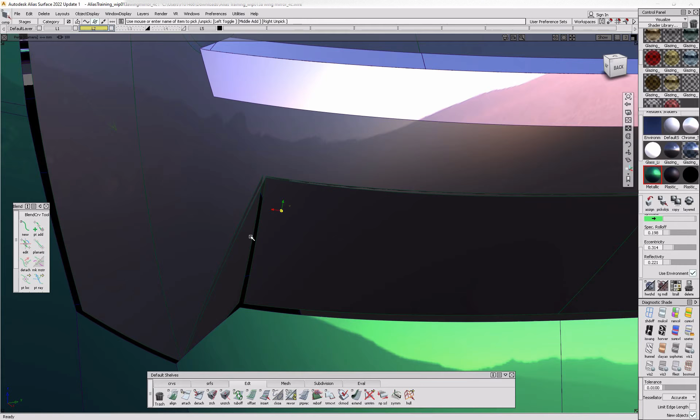And then we will hide the glass surfaces, the original glass surfaces. And then when you get things like this, just make sure you trim them back nicely. This is the problem with the offset tool, so I'm gonna play around with it.

Just snap this to there, that'll do. All of this that's intersecting, just select them all and select intersect, and intersect it with those surfaces and trim away. Just trim it all back, make it nice and tidy before we do anything else. Trim, trim, trim - obviously some curves on surface aren't going to go all the way to the end. I've got a little bit of a cold, so please try to ignore the sniffling.

Okay, these guys down here, intersect, trim back. Did I insert that there? Didn't work. Still didn't work because this needs to be extended this way as well. Wrong one. Oh no. Alright, untrim, trim. There we go.

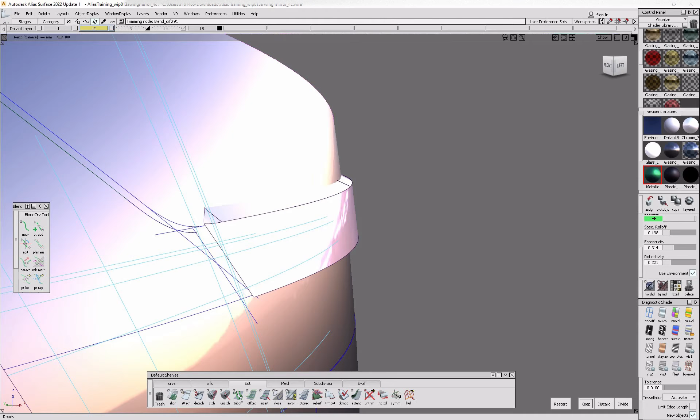Oh, I accidentally trimmed too much away. Still too much. Just want to be able to see most of it. This chrome strip as well, I noticed maybe I've trimmed it a bit too soon - it's meant to roll around this, so let's just get that glass back quickly. That'll be enough, yeah. And we'll kind of meant to just flow with this.

And then there'll be a radius there. Cool. Untrim, get rid of that. Oh, actually no, just get rid of that. Oh no, don't get rid of that. Trim that curve on surface back to there. Now project - sorry, get rid of this.

Project this on, and build a blend curve from like there to there. Cool. Project that on and then trim all of that back. And then untrim that, reproject that on. Right. And trim.

Cool, I'll do it right now, get rid of that glass. This area, go by that. Oh! There's going to be a radius on here, so that will help that. So we'll just trim that back for now. Or shall we do that? No.

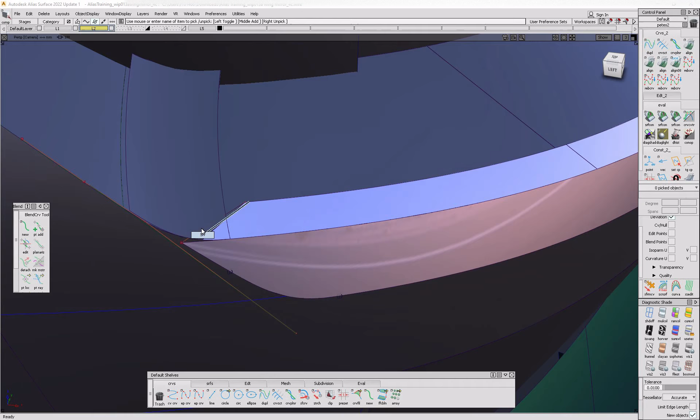Let's trim that away, keep. And get that surface as well, trim that back. And then we're going to run this all the way along. So there'll be a bit of an offset, there'll be a bit of a gap, but it doesn't matter. There we go - yeah, so that's annoying, but whatever.

Not bothered by that right now, let's concentrate on getting the details in for the lamp. I just realised probably want a surface in there. Okay. Yeah, don't forget these, we don't want those, we want these. Yeah, these need to be extended through. Screw that guy.

Freeform blend - so we just want to make sure that we have a clean base to work with before we carry on. It can be a little bit messy because the eye will be distracted by a lot of the details when we project them on. Just delete any rogue curves and surfaces. Right.

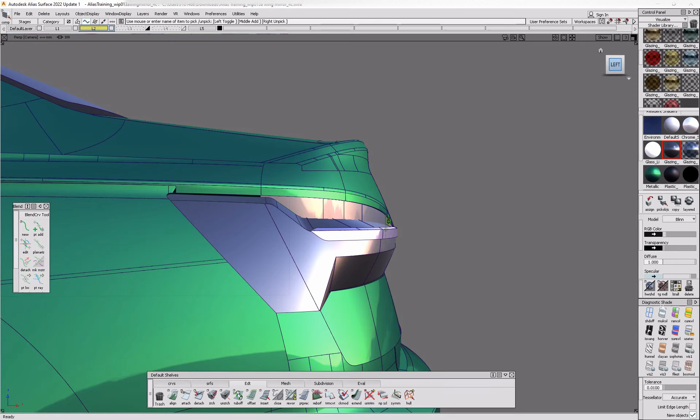Okay, so we have our base. What should we do first? We'll do the big lines. So here it looks like it is draft - this looks like the core, and then we draft off, like there's some 3D there. So we'll project this on first and work from there, so side view. I don't know what that little sliver is, just looks like a chamfer. Okay.

Get some crown in some places. Is that correct? Yeah, I think so. It's just this is all going to be quite thin and then it's going to draft back. Okay, so let's project that onto those.

I can give that a bit of crown. I'm going to use this shader. Okay. I'm good. So for now I'm just going to trim divide because that's the best way, like we did on the headlamp. And then you can offset again.

Oh my god, where's it gone? I thought I divided. That's annoying. I've obviously selected keep rather than divide. Okay, so make sure you select divide. What's going on here? Too many curves on surface, getting confused.

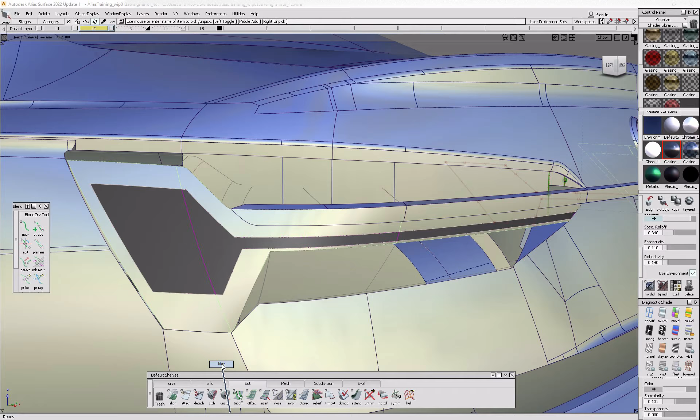Right, so we've got our main surface in here now. Show you a different colour so we know. And we'll offset back because, wait there, let's have a look at the image again. Yeah, there's like a little bit of section there. So let's put that in and we can just work around that.

So I'm going to offset these back again, maybe another 3 mil, but we'll see. Yeah, let's go for 3 mil. So we'll just template these outer edges, outer surfaces, just in case we need to go back to them, and then we'll skin between there and there to give it some 3D.

Skin, connect ends, skin. You can also give it some crown, proportional crown, so yeah, tiny bit. Oh my god, skin, proportional crown, make sure they're all going in positive proportional crown as well. Like if I flip that, you'll see that it's negative, now it's positive. Here.

Oh, that's annoying. Why is that? Anyway, it doesn't matter. So we wanted it to come to a point here. At the moment there's a trim edge that is a radius, we don't want that. So we're just going to extend that through, maybe extend that through as well. Flip the crown, there you go. Probably just extend this as well.

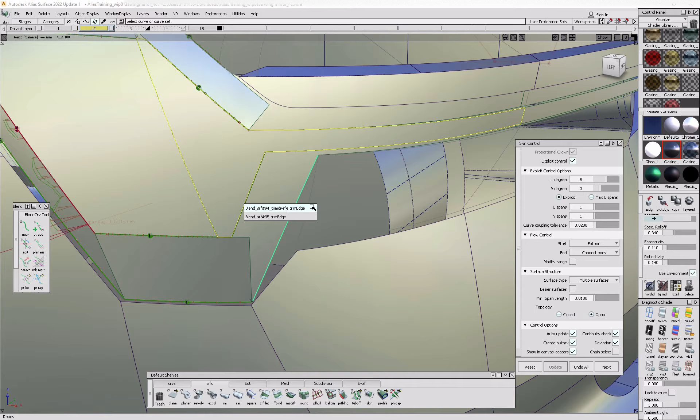And we'll just build our own radius in there, down here, let's just extend that. Make sure the crown's going the right way. It is, this one can be connect ends. And also as we're doing this, as we're going along, keep making sure the crown's going in the right direction, but also that doesn't look like it's going right. Oh, it's because there's no crown.

There we go. Does this one have crown? No, don't know why it does that, and it's going in the wrong direction now. Flip the crown. Does this one have crown? Yes.

We check from the rear view as well that it's making sense. Yeah, that looks okay, I think. Yeah, I think that's correct. And if it's not perfect, I don't care anymore. Yeah, no, it looks right based on the image, 3D image.

Skin, 1, 2, flip crown. Oh, this one isn't doing what I hoped it would do. Undo that. Yeah, why are they doing different things? Whatever, we'll retrim this because this edge has gone a bit funky here, so we'll just retrim that to match this edge.

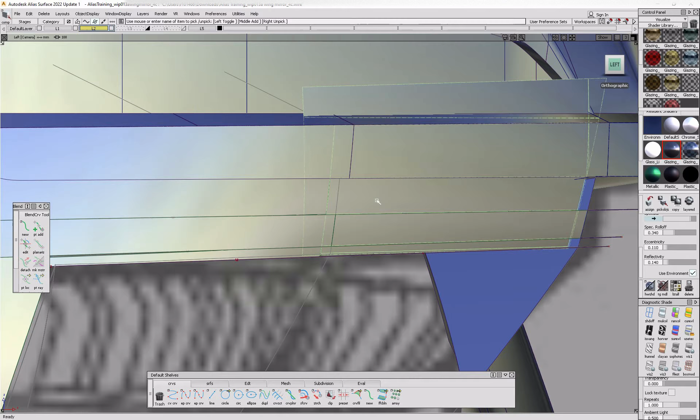Untrim. Keep. Oh. This one as well. Oh, it needs to be extended. Project, trim, trim.

This little sliver here needs to be fixed, so we just need to extend that. Ooh, those CVs aren't liking it. Alright, let's just keep it as is for now, we'll fix it when we put the skins in. I'm going to hide this chrome strip because it's annoying me. This is meant to go from there to there, but it's not. That's fine, because we'll just do this one.

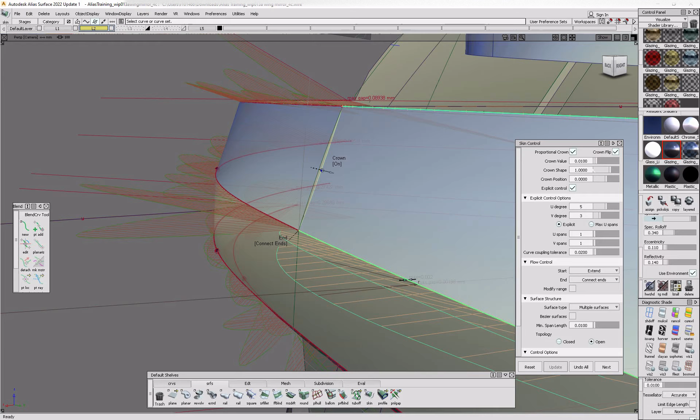Okay, good. Skin. Is the crown going in the right direction? Yep. Skin here. There, and then same for this top edge. And it doesn't matter, like, obviously you can see positional errors, it's not a big deal, especially when doing these little details, because you can just radius over the error.

Oh, here there's an error because I didn't align this. This projected curve needs to be aligned. Now that should run more smoothly, even if it's not perfect. Why is it not perfect? I don't know.

Same for this as well. What's going on here? Oh god. Wow, okay, well that's obviously an error. And let's Bezier, weird, I don't know why it's doing that. Let's try skinning again, see what happens. Yeah, so weird, try freeform blend, position to position.

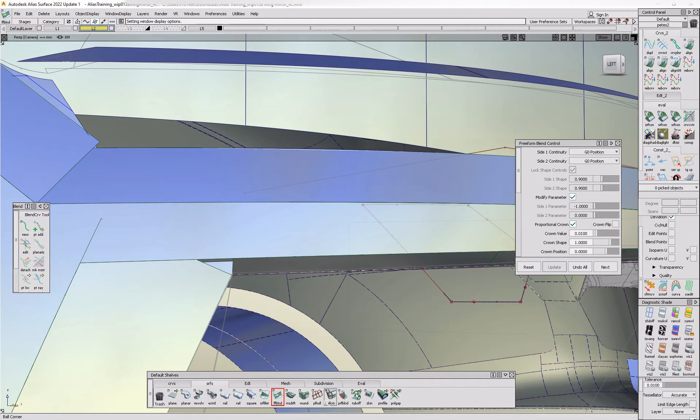There you go, it's Beziering surfaces now. Can I extend? No, it doesn't let me extend, of course. Whatever. Proportional crown, 1. At least that's all connected now. Sometimes skin just does some weird stuff and doesn't like what you're doing, and you have to find other ways to do it. I'll just extend this through here now.

Get rid of some of these curves. Gonna trim this back.

Okay, so that's the first bit in. There are areas here that need fixing. I'll tangent align that to there, and tangent align that to there. The reason I'm using tangent is so it doesn't affect the surface more than I want it to - I just want to minimally align them to each other without affecting what they're doing too much.

Now let's put these radiuses in, freeform blends, whatever you want to call them. I'm using the freeform blend to manually put in my radius. So do it about there. 1, 2, 1, 2. We need to move these along a bit, just so that's around the center point. Freeform blend, make sure that's back to curvature, curvature, and align, edge align, edge align.

Project that edge on, and trim it this time. I'm just going to discard the little triangle. Oh, it doesn't like that, see, so I do need to move that back that way. It's fine. Surface behind it can now go away, we don't need that. Just templated the surface behind, just so it doesn't get too confusing. And then we've got a nice 3D object for the tail lamp inner.

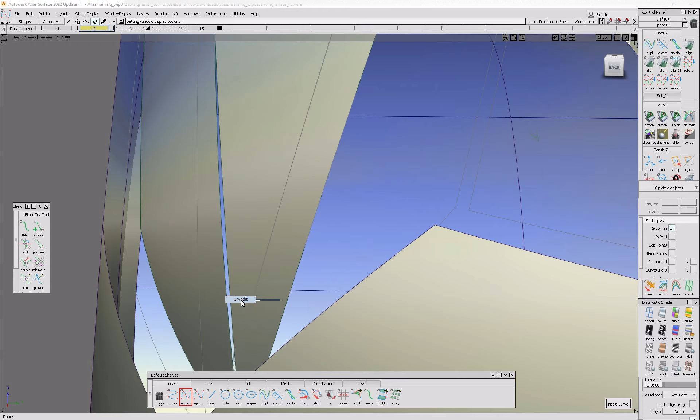So on mine, there's an obvious break. Well, it's not terrible. Why is that so much more crowned? It's the same amount of crown. Is it going to different points?

Anyway, we'll reduce the crown on this bottom one. I'm going to stick with what I have, and I think the graphics trick the eye into thinking it's flat when actually there's a break somewhere. So that goes all the way along to there, whereas mine stops here.

Yeah, it's confusing. It looks like it's trimmed and there's like a ledge there, right? So, yeah, let's just trim it away here.

One, two. Sorry, and this one. See what that looks like. Oh, I discarded - make sure you select keep. Keep. Yeah, so we want that to be more flush.

But for now I'm just going to disguise it with a big radius and see what that looks like. Keep. Freeform blend. Whatever, that'll do for me. Trim that back.

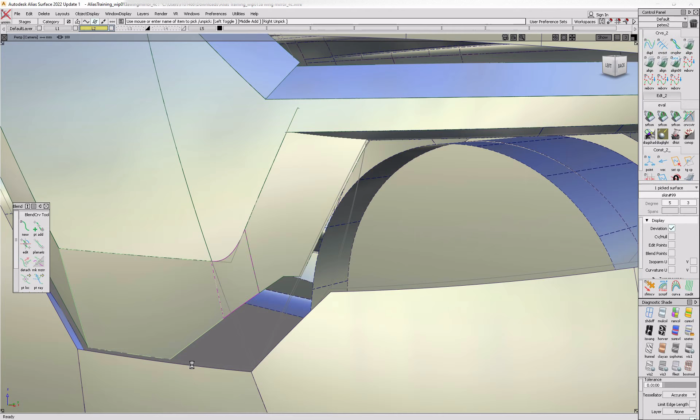So yeah, that is meant to be more like that. Mine goes a bit wonky, but it's going to be difficult to fix that.

So like, oh, I've lost my shelf. There it is. And this is why details like this are so tricky, because there's so many little intricate edges that you need to get right, and it requires you to keep tweaking areas to make it look the way it should.

Delete that, freeform blend. Trim that back, and then the top one up here as well. Trim, freeform blend. Edge align.

And then these two down here. It's quite a big one here. Two. Freeform blend. Set this edge align straight away.

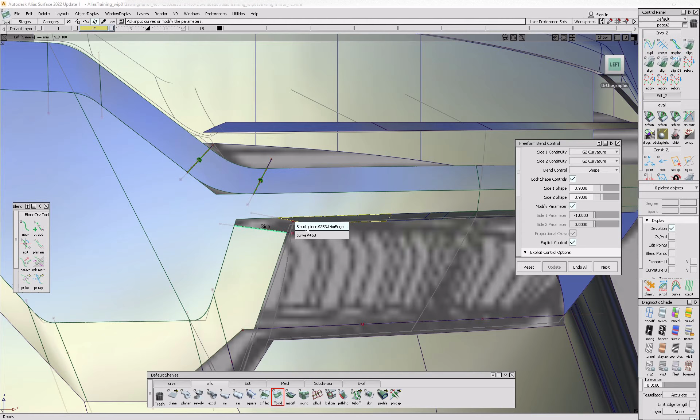So here I could just use the fillet tool, but I don't know, I'm in the habit of using the freeform blend tool, so I'm just using that. As long as you draw your curves in correctly, then it won't do something weird like this. Oh, it's not liking the edge align for some reason.

It should be fine. Right, okay, let's try the fillet tool this time. 1, 2, go. No, it didn't like that. For some reason it's not liking it. It's really weird. Oh, it's on chamfer - make sure it's on curvature.

Edge align. It's on, my settings are all over the place. Why is it not liking this at all? Weird. Yeah, look at that. Why is it doing that? It shouldn't be. Is there a curve on surface there? No.

Anyway, if everything else fails, just skin. Connect ends, and then just align it. Align the skin. Edge align - yes, so it works when I do edge align with the skin, but not when I do it with freeform blend.

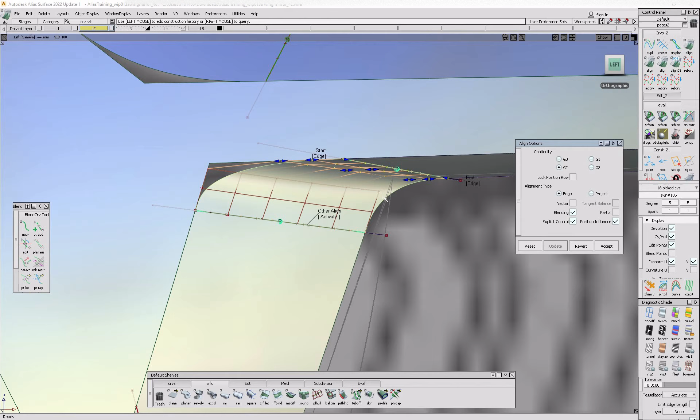This shouldn't be going so weird, so that, and that. That'll do. Delete the history. And then we'll just retrim this surface to those edges. I'm going to delete the history on all of those, because when you untrim it just seems to do stuff that you don't want it to.

Untrim, project these curves on, and keep. Actually, it doesn't like that either. Let's get rid of that. Oh no! Reproject this curve on surface. 1, 2, 3, go. Okay, that's our first bit of 3D.

Next, I don't know, should we start from the bottom? This is just a big flat here, and then a big flat on top, but leaning backwards, and then just trim divide. So let's do that one. Get that one out of the way.

And we can probably get this back and template that and trim it. No, it doesn't like it. Alright, forget that. Template that. What we're going to do is draft off of this lower edge. It doesn't like that either, does it? Yeah, no, it should be trimmed all the way to there. Why didn't I do that? I don't know, I didn't trim far enough inboard. But I can fix that by doing that now.

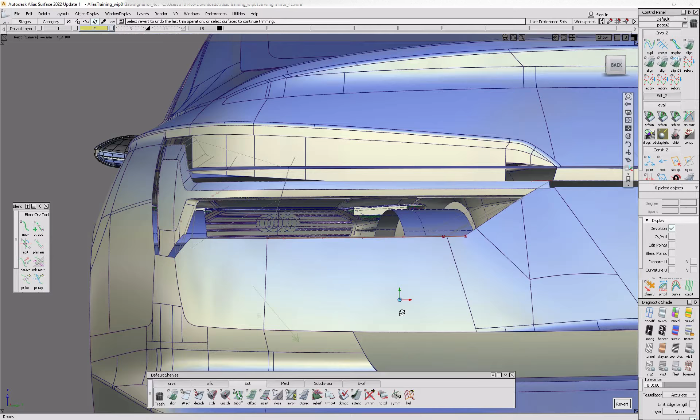Let's trim that back. Keep. I'm going to duplicate this curve on surface and extend it, so we don't have to sketch a curve and align it. Cool. And then we're going to just look at the image again quickly.

Yeah, so it's just a surface that should be offset to the glass, but obviously I'm not going to do it because I feel like this is doing something different to the glass anyway. Like the glass is leaning out this way, but this surface is a bit more upright. So we're just going to draft off of this lower edge of the body like that.

Give it a bit of lean, like 5. Yeah, we can do this manually anyway. I'm just going to bring it to there, maybe extend it through. Oh, come off it. Try extending this. There we go. And we'll judge that. That needs to come all the way up to there.

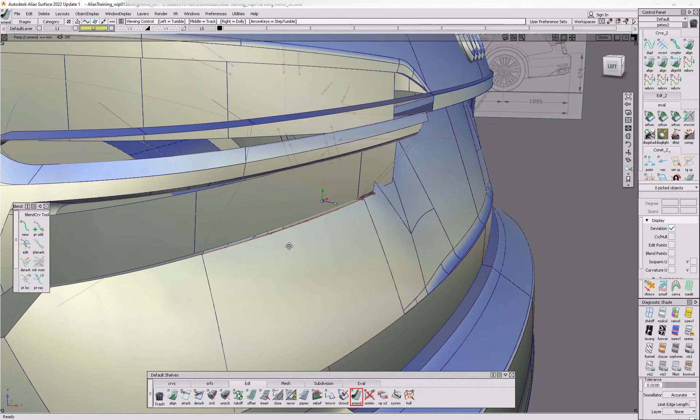So let me look at the image again. Stops there. What we're going to need to do is just project the line on for now. And okay, so the core is there. It seems to go down like that, which is weird, but it should just be straight in side view, I feel. What's it look like in rear view?

Yeah, so that orthographic's crap. Side view, it shouldn't be rotating downwards, it should just be nice and clean. Cool. Let's also trim the bottom away as well.

Yeah, we'll use this curve that I already built. Trim, trim, trim. And in order to stop it from clashing through, well then again, no, the glass is offset, so that's fine. Just trim that back. I feel like it can actually come further rearwards. Yeah, that also doesn't matter because it's also.

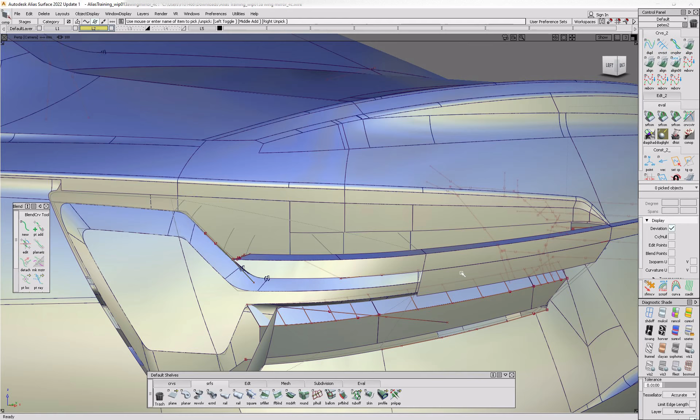I'll just do this quickly. Go away, yeah, I'm just going to have to shade it all up. Oh no. 1, 2, 3, go away, go away, go away, go away, go away. Go away, go away. Actually, I'm going to keep the chrome there. Go away. Get rid of all the curves. Get rid of that guy because it's distracting. Get rid of the templates. So I've just hidden the templates, I haven't actually gotten rid of them.

That's template, because that's going to be different now. That needs to be shot through. But anyway, one thing at a time. Now we're going to trim this. So it's like there's a border. But that border is just from this. So that's fine. It looks like it should be lower then, but let me see again.

Yeah, it's so pixelated it's difficult to tell. What I've got is fine. But yeah, no, I feel like this core line is running completely wrong now. It needs to be running parallel to that. So let's undo this. Untrim these.

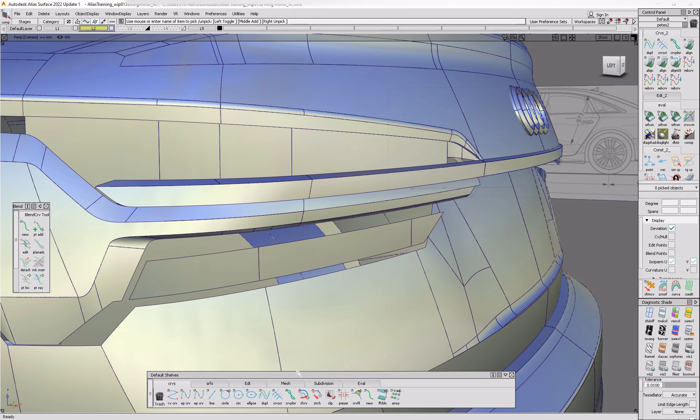I could probably lower it a bit. Okay, we'll trim it away here. I'm going to make it run parallel, so I'm going to lean it backwards. I want this edge to run parallel with that. So in order to do that, that curve, we just have to lean it like that. And that's good.

Right, then draft off here again. Yeah, annoyingly, because the orthographic's so bad, I'm going to judge it from this angle on the orthographic. That's about right. We'll just get it to shoot through. And I'll up to my curve. Yeah, I'll do.

And then also, yeah, I'll trim it. I'll trim the top edge away. Use this curve so it's parallel. Trim it around there. Actually, gonna get it to taper a bit.

Okay, and then the next bit is curves on surface, or let's close this gap off, skin here. 1, 2. There's crown, it doesn't need crown, let's get rid of crown for now. And 1, 2, extend that through.

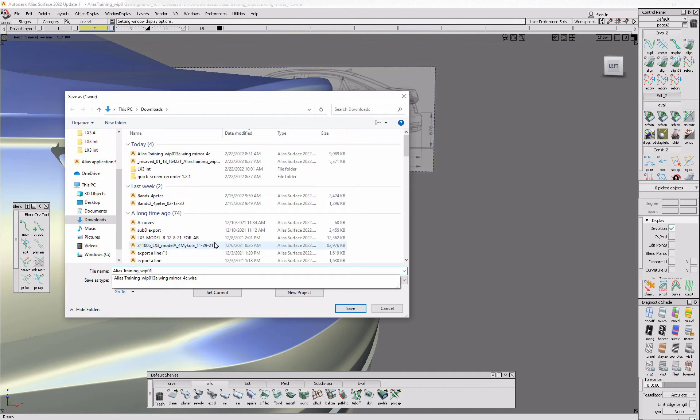That's cool. Just don't forget to save your work, bloody hell. Why is it still on wing mirror? We don't want that. 13. Let's go 14B. Hey, sorry.

Close this up as well. It's not going to like it. So what I'm going to do, so the curve doesn't twist, I'm going to cheat it and give it a slight offset. Because if I were to build a skin from there, that edge to these 3 edges, it's going to do something weird. So I'm cheating, building my own curve.

Still going to twist a bit though, I think, because it is doing something completely different. Yeah, it's twisting a lot. And what's it doing on the image? It's all black, so you can't really see. I'm going to cheat even more. I'm going to give this a big offset here. Get that in, just get it to do what it wants to do.

Is it proportionally crowning? No, let's give it some crown.

I'm going to move it so it's parallel. Because when the 2 edges are doing something different, completely different in lots of directions, that's when the surface will twist. But if you get it to go parallel with each other, then the surface is going to look a lot more tidy. Give it less crown now.

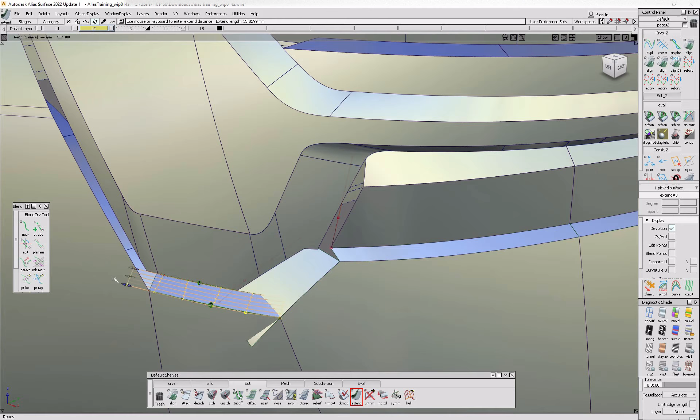Got another skin. Let's extend that through. Extend that through, make sure it's set to merge. Extend. Yep, at least we're getting something that's a bit more closed off.

At the top as well. I don't know what I'm going to do at the top yet, but here I'm just going to draft in with some angle in Y. That's probably too much. Minus 5. Yeah, I'll do that.

Cool, right, let's look at this area again. There is meant to be a gap there. There's actually another surface offset back, but we'll do this trim first, and then we'll offset back to create these surfaces behind.

Okay, all we need to do is figure out, I think this is the surface behind, these are the surfaces in front. I don't know what these little slithers are, let me have a look again. I guess they're those, which I think are like 3D draft or chamfer backwards. So it gets a bit complicated.

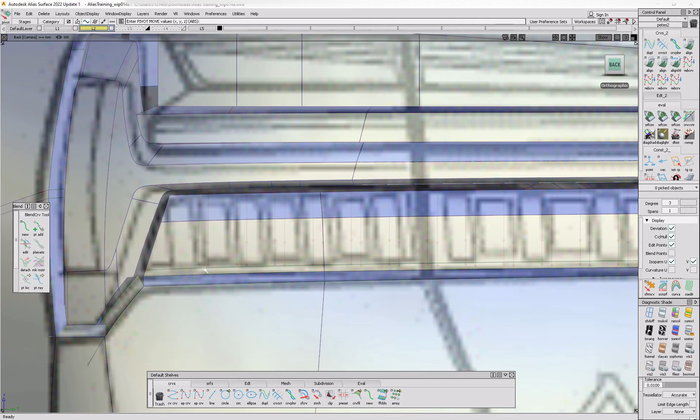Yeah, that's not it. Make sure the pivot point of both these curves are set to that point there. Edit, duplicate, object, let's try 20 mil. Closer. I'm going to have to measure it, aren't I? Fuck.

Okay, so the way I'm going to measure it is, I'm going to bring that back a bit actually. Copy, paste, I'm just going to do it by... Okay, so that's about 17 mil, 17.5, we go up to 18. Yeah, let's do 18 mil.

Let's try that. Edit, duplicate, object, 18 mil. Go. Yeah, that'll do. Will it? Look, on this orthographic, some of them get bigger and smaller anyway, so obviously we can't follow it completely.

Are they meant to get bigger? I don't even know. I think they are meant to get bigger, yeah, that's weird. Alright, let's do it by eye. These last few just get a bit bigger. Very strange. Doesn't really make any logical sense.

Oh, I've just realised... no, sorry, start that again, confusing myself. I've missed a curve somewhere here. Oh, I've lost a curve. So let me just... alright, 1, 2. I can't see anything. There we go.

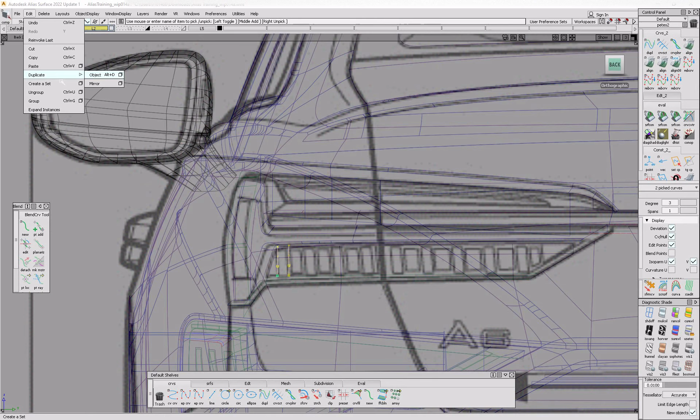I'm just going to do it by 1, 2. Oh man, I'm really confusing myself. Let's go back to what I had. Edit, duplicate, object. No, it's not meant to do that. Copy paste. What I was supposed to do before when I was measuring is measure to there. So that is, let's say 34, yeah, 34. I just got my measurements wrong. Edit, duplicate, object, 34. This can definitely be 10.

There we go. And yeah, like I said, it changes size there, so we can either take the initiative to do it by eye. So from here it starts to get bigger. The gap gets bigger and bigger, so let's do that.

1. God, it's so difficult to tell though what's going on. 3, 4, focus, 5, 6, 7. Okay, and then they can go away. Good, we've got it. Right, now let's project those on.

Obviously the curves themselves need lengthening, which is annoying because they are too short in places.

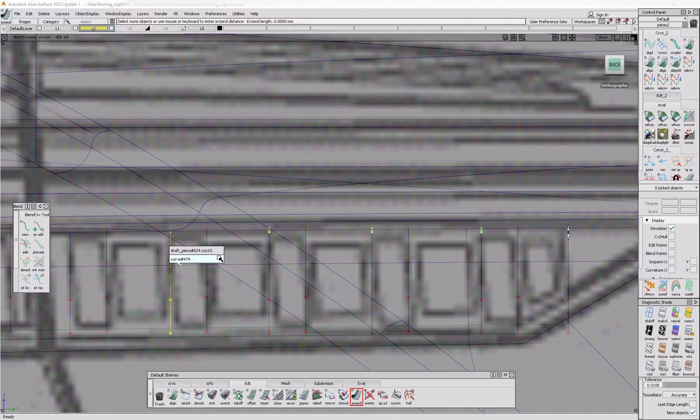Okay, extend and project. I still didn't extend them enough. That's so stupid. Alright, no. Oh, I haven't trimmed it, that's annoying. Extend one. Now it thinks I want to extend the curve on surface, which I guess I do, but I'm just going to try and not do that so I can keep the history.

And extend, right. Now we've got to make sure we trim the right ones. Yeah, so of course they're not long enough for the bottom either. So what I'm going to do, I'm just going to make the border thicken. I'm just going to extend it, screw it. Extend the curve on surface.

Alright, so now we want to just keep that, keep those, keep. Ah, it's like this curve on surface isn't long enough. Keep. Cool, looking good though. Keep, yep. Keep, yes, nice. And then we'll create the surface that's back.

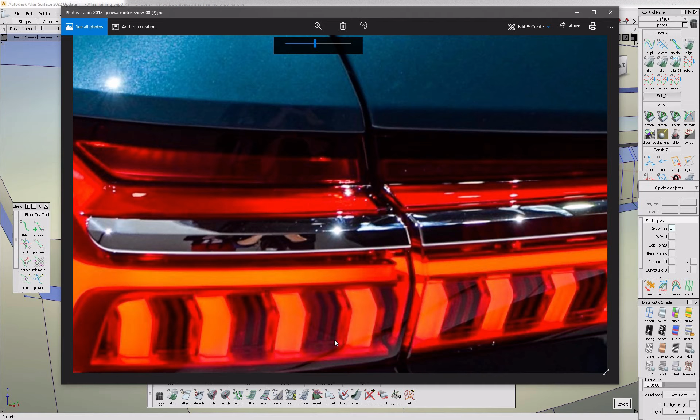Cool. And then, so in this image, it looks like there is like a chamfer, but I don't know. Oh actually, I think it's just, yeah, this draft, it's got a draft angle into this back surface, so that's what we'll do. So actually this surface at the back is too far back.

Okay, now we'll just draft off. I'm going to localize these so we can do the draft all at once, so just make everything else invisible. That's annoying, what's it doing in the image? Of course it goes up. To fix that they could go up there, so let's just fix that. Maybe do that. Oh whatever, when I hid everything else I also hid the orthographic view.

Let's delete that. Oh, should I do that? I don't even know now. What am I doing? Yeah, I can delete that. To keep all that, keep that. There you go. Alright, now we draft.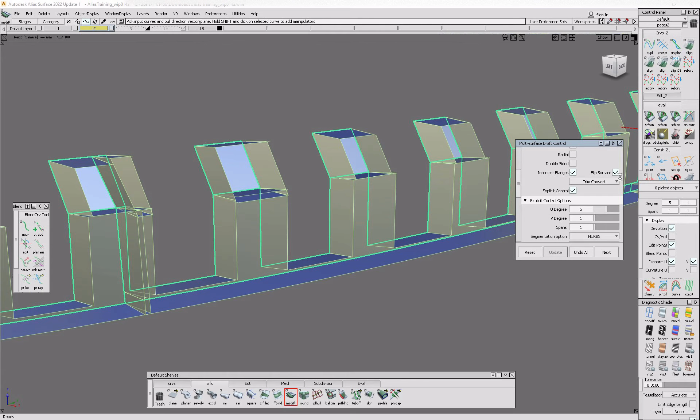Draft tool, make sure, okay, I'm going to do -5 for now. Oh, I'm going to, yeah, -5 for now. Doesn't need to be so big. 10. And next. And then just highlight everything. And hope it doesn't crash. There we go. Oh, it's done it the wrong way, so you flip surface.

Good, and is it all? Nope, I was hoping it would all go the same direction. So what we're going to do is 1. I don't want to do 0 though. I want to do it 5 degrees.

Alright, undo that. We'll do one layer at a time, so we'll highlight all those bottom ones. No, they're all going in the same direction. Maybe normal? No, it doesn't like it. Okay, well we'll do it along with it. 1, not normal, draft.

We'll do it, draft angle 5, -5. 1 at a time. 2, 3, 4, 5, 8, 9. Okay, and then the bottom ones, 2.

Feel like the angle isn't harsh enough, but we can all, because it will keep its history, change that later. Alright, this is going to be +5 now. No, -5. Actually this is +5, but I'm going to do it 10 instead. I want it to be harsh, that's it. This is going to be -10. No? Ugh.

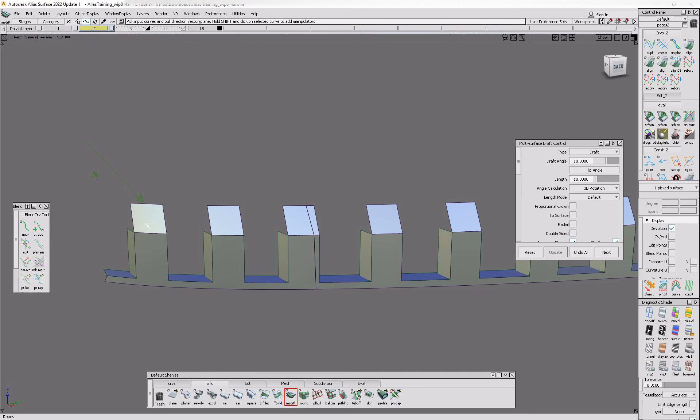-10. Or maybe not. +10 then. Yeah, cool. Cool, same for the top ones. -10.

And just keep going, and then the top ones. The reason why I wanted to do them all at the same time is because when you do that, usually there'll be no gap here, they'll merge themselves together so it's all one. But it didn't want to do that, so we have to do it separately and then intersect them with each other.

Let me grab the back surface, not that one, one, two, just to see how they intersect with each other. It's probably a bit more dramatic on here, so let's do 15. One of these, negative 15. Yeah, that didn't work, negative 15.

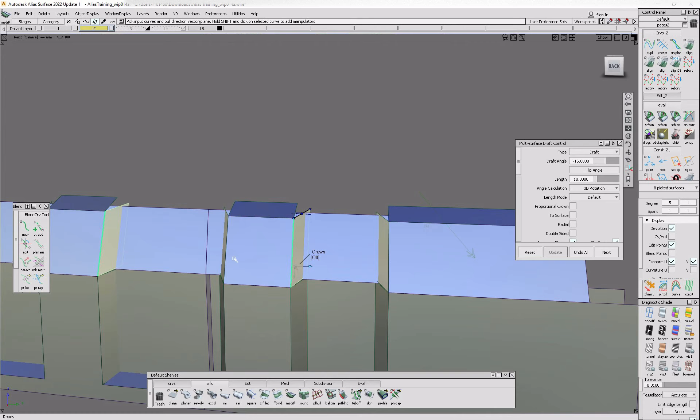Okay, and same on this side. That one was on its own. Why is that? Of course, we have to position and align them all as well. This is where it takes time, but whatever.

Instead of, I don't know, let me have a look at the image again. Right, okay, position align these now. I feel like we've got dramatic enough. They're not long enough, that's alright, I'll bring this forward. One, two. I just want to make sure they're all intersecting.

That's good. Right, now we'll position align all the top surface bottom edge to the lower surface top edge, just to close them off. And of course, we'll probably radius them as well.

Best way is to just do one side at a time, so we'll do all the ones on this side first. Like I said, all these little detail areas, they're probably the easiest. I mean, they're a bit difficult to figure out, like what's going on sometimes. Look, we're missing a surface, of course.

It's alright, just untrim that. Or did I just leave it behind? No, it's alright, I'll copy and paste this back surface, snap it to there, you go. So they are the simplest technically, but they are difficult to get your head around.

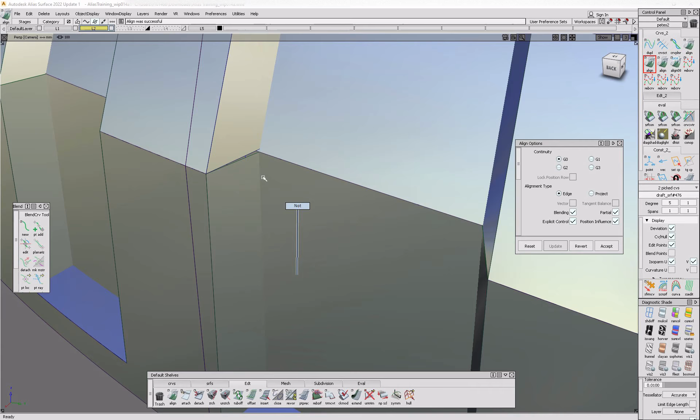For God's sake, seriously. And that is one of the reasons why it takes so long, but also just because it takes long. There's just lots of little fiddly areas like this that you have to align to each other, close off. That's why I prefer to let other people do this crap, I just do the main surfacing, because yeah, screw this, boring. But it was worth it in the end, I guess, when you come down to render your model, it makes it look much more realistic.

Right, extend. Let's just grab them all at the same time and extend them all. Yeah, yep, yes. Right, delete history first because it's going to keep asking me to do that every time. Save your work just in case it decides to crash.

Alright, extend, one through nine. I'm going to extend those just in case I accidentally mess that up. Alright, cool. And then the other side, one through nine.

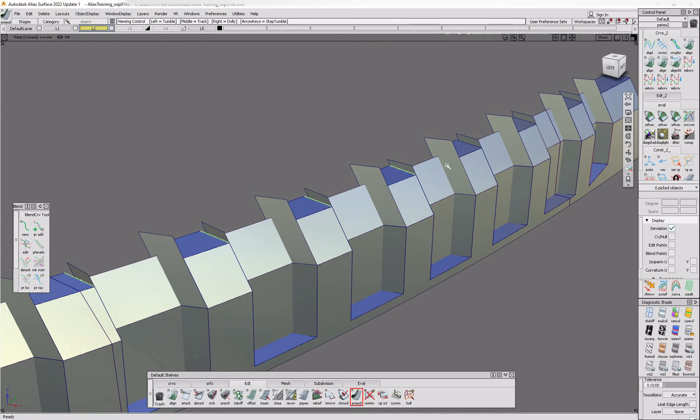And then, so an easier way would have been to have a draft off of the one curve on surface, but whatever. I've done it now, haven't I? So yeah, I'm just going to extend them all through. One, two. Oh, come on.

Extend. Oh, I didn't extend it enough, did I? Always make sure it extends all the way through, otherwise you're going to have situations like that where it won't trim away. There you go, so the rest are intersecting fully, just not that. And then the other side.

Do that. Extend, and then untrim this guy, to this guy. And then intersect, so we'll just grab all the surfaces you want to intersect. We just want to intersect them with the back surface to begin with.

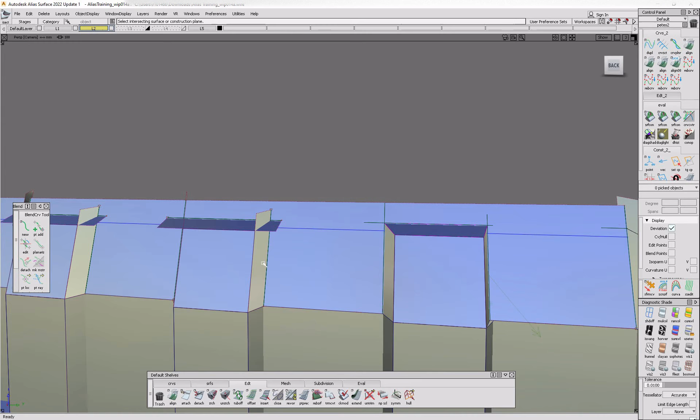So let's do that first, intersect, one, two. Sorry, I did that too many times anyway. And then we want to intersect them with each other. I'm just going to trim as I go along to make sure that they're intersecting correctly, curves on surface are doing what they're supposed to be doing. Trim, trim, trim, trim, trim.

Okay, now forget that, I'm going to select all those and then I'm going to intersect one by one, two through eight. Trim, trim, trim, trim, trim. That one didn't intersect. Oh god.

Cool, and then radius. So yeah, again, it would have been best to do all of this first and then trim away, but like I said, I've done it now, so just carry on.

This one can just be extended. Delete history. Oh god, let's save your work, because when you fillet it, sometimes Alias doesn't like it.

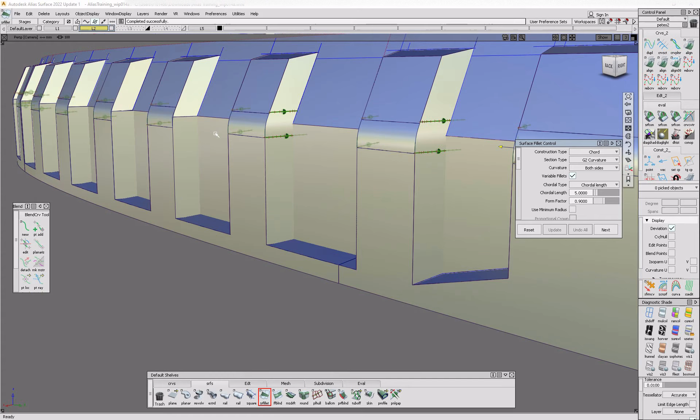I'm just going to rad those, even if it doesn't line up perfectly. Who cares, it's very tiny details. Unless you're being asked to work on like a headlamp on its own, then that's when you're more careful. But because we're modelling a whole car now, and it's just for Viz, just for VRED, it's not a massive deal that things line up. But obviously at production level, it is a big deal, so you have to make sure everything's perfect.

Oh my god, it doesn't want it. Oh no, that's why. I'll manually move that. Oh no, I want to just move that edge. And of course that messed that up as well. Trim, extend that curve on surface.

Back to the filleting. Edit. Oh, okay. Cool, right, that's done. I'm just gonna delete the curves on surface because they can be ugly.

And let's make everything visible again. Hide the curves, get rid of that guy, get rid of the glass. I should have grouped the glass really, let's do that now. Just gonna make sure that chrome piece is separate from the glass, so I've just copied and pasted it, so now it's its own object.

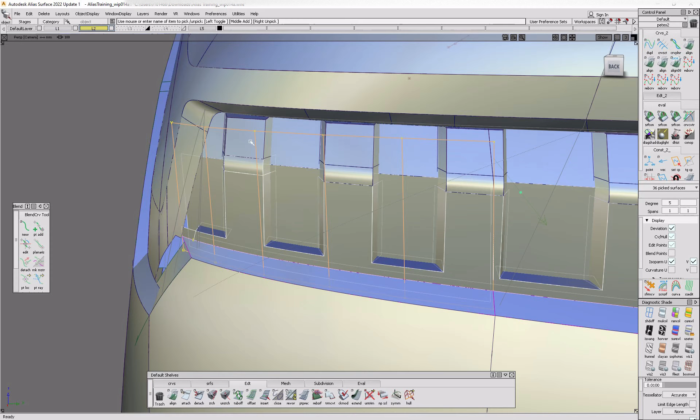Select everything individually again. I'm going to group all this so I don't have to keep selecting everything individually. Let's see if I can just get rid of these surfaces behind it. Group all this too, and then hide it. Group, hide, done it. Group.

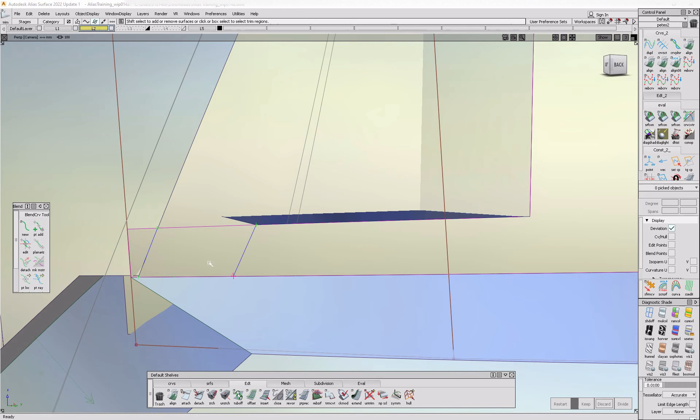Okay, let's bring this guy back, move it forwards. That's better. Nice, right, so let's trim this back to there. We'll probably do like a blend or something there in a bit.

What's this surface? That's the blackout. Cool, right, next. Next, let's have a look. Just draft, yeah, this area here, and then we're pretty much done. So that's good. It looks like.

Zoom in a bit. Yeah, so it looks like this is a surface here on top of that, and that's how they get rid of this little rat hole that I've got. Anyway, yeah, interesting.

Basically, I think I've offset it a bit too much from the glass, but it doesn't matter. Bring this back, I'm going to shade it up so I can see what's going on. Let's make it see-through. Yeah, I've gone way too far, like 3 mil was too much in the end, but oh well. It's still all good.

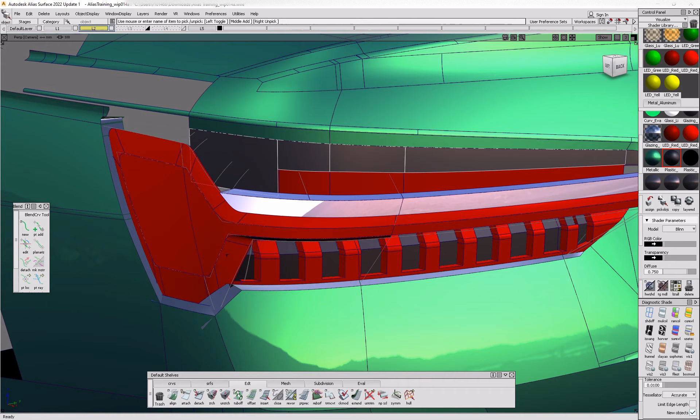Let's colour this the correct colour, just do it all red for now. Where's my red? I haven't got a red yet. Let's do luminous red. Let's do red on. And these surfaces are going to be black. 1, 2, 3, 4. I'm missing a surface there, I'll fix that later.

Yeah, this needs to be glass as well. Where's the glass gone? I'm going to trim this back because otherwise it starts to do something weird. Can't see now because it's see-through. There we go.

It's alright, yeah, now I just need to do this bit in here. So let's do that, right, get rid of the glass. Maybe I do need to do a little thickness here.

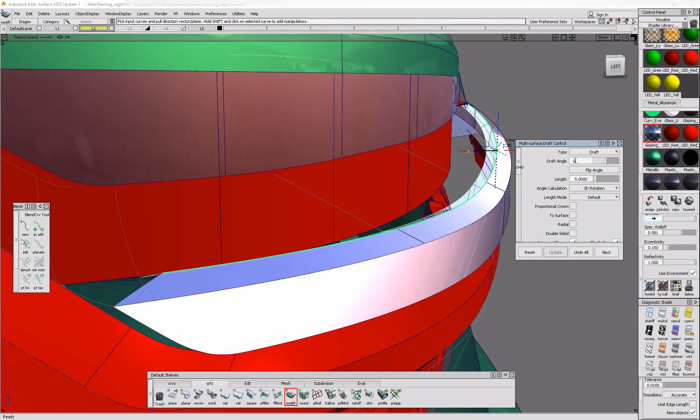So let's draft back in X, just 0 degrees. In X, yeah, no, sorry, I did the length at 0. I need that to be 5, 0 degrees, and we want it to be chrome. It's still 10 minus 10, 0. There we go. Same for this, and that.

Okay, let me get my head around it. There's just an offset there, and a gap there, but that's fine. I'm going to draft off and shoot these surfaces in. It's going to come off of this. Make it a bit bigger.

It's making me think, should I just do it by eye, or should I be projecting it on? I probably should be projecting it, like skinning it, I mean. Anyway, let's just try this technique first. I've tried this a lot of times in this tutorial, and most of the time I go back to projecting rather than doing this. Yeah, because look at that horrible line there. That's not good.

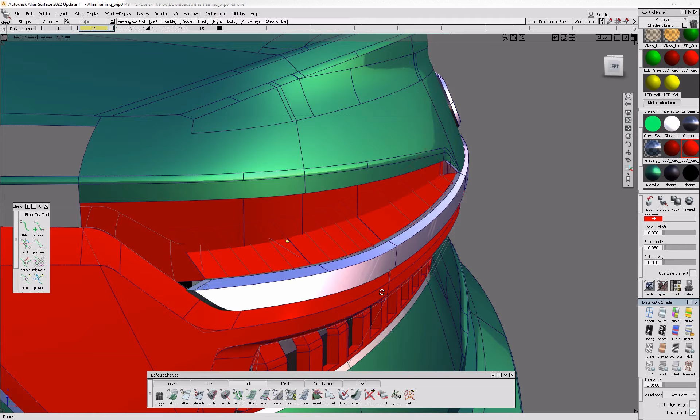And that's what it's doing here as well, wobbly. Let's get rid of that. So in order to stop that, I have to project on. Let's do that. And then we'll skin, and hope it doesn't twist too much. It seems to be doing something similar.

I feel like this is harsher there than that, that's a lot softer. But anyway, just build it, because it's going to be like luminescent red as well, so it's not a big deal. Oh my god.

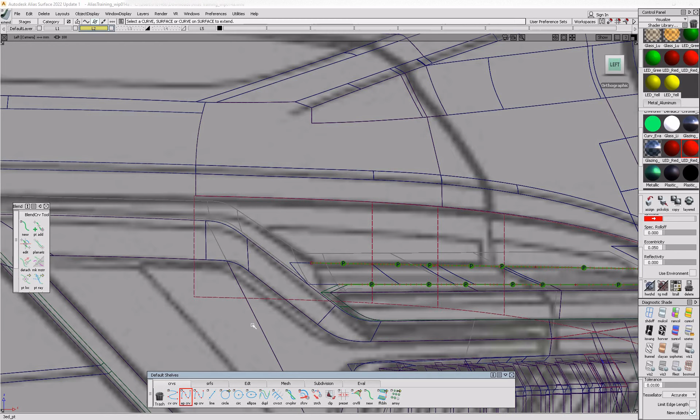I'm going to do freeform blend, position, and chain select. This is going to just shoot into the draft that's going to be there. Cool, it's worked out quite well.

Another line here. I'm gonna do this. So yeah, we need something there as well. For some reason I didn't offset that, so because there isn't one, right, I'm gonna extend that but not merge. So yeah, turn merge off. See what happens, it's probably going to go a bit crazy. Yeah, not great. Let's try linear.

And I can kind of just manipulate that the way I want. That'll do for now, it doesn't have to be curvature just yet. I don't know, yeah, let's make it curvature. Default, curvature. Cool, okay, and then skin. No, skin. And then freeform blend, curvature, curvature. 1, 2.

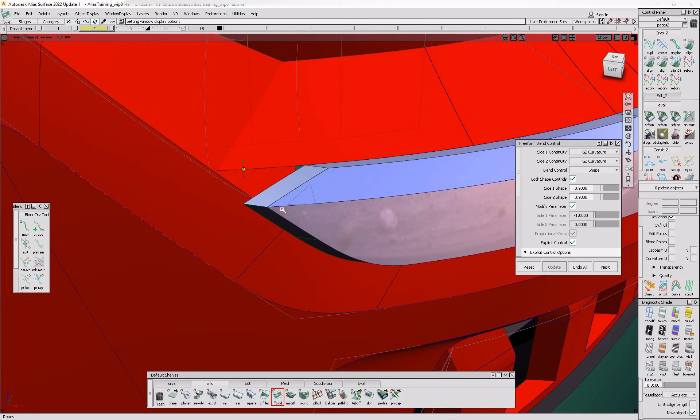And then there's a gap there. What do they do in there? It's just the thickness. I'm just going to fill it in with the draft down, and Z. Oh, it's too big though, let's shrink that down.

Nice. And to go around this corner, I'm just going to do monorail, also extend that through so it closes it off. No, merge. Okay, that's all closed, it's 3D. It's looking all right.

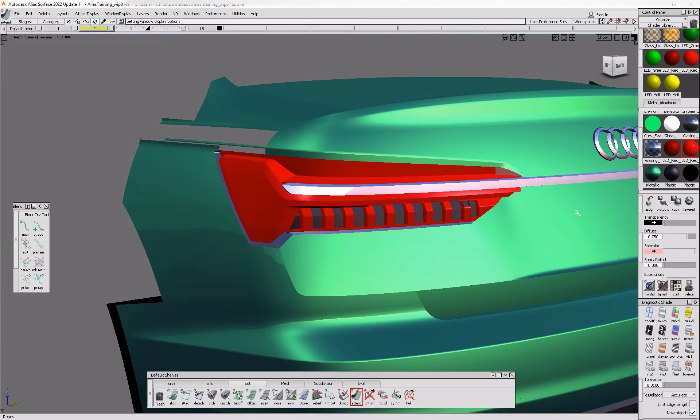We just need to separate things off now. Like, yeah, this red is actually quite cool because it's a bit more reflective. So we'll just edit that in here, give it some reflectivity. It's not doing it. It's a spec roll off. Change the specular a bit. It's better. Cool, right, looking good.

This surface here, yeah, we need to tidy all this crap up. Actually gonna just move it outboard a bit, this edge. Okay, let's try and round this off, see what it does. Oh no, yeah, that's a bit different to this, I think. But don't care anymore, right, let's just round it off.

Okay, it's gonna have to go this way and that way. I don't know, let's see what happens. A bit too big, that. Freeform blend. Don't remember what shader I used for this, glazing. Yeah, look, that's twisting like mad. Damn.

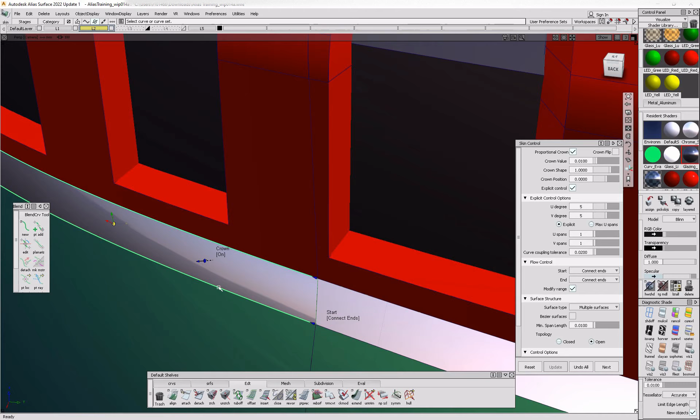Sorry, untrim. Untrim. Twisting anyway, because the crown, oh yeah, needs a bit of crown. Same here, same on this one. Yeah, so I was going to try and build this in correctly, but I just feel like anything I do isn't going to work.

Like it does need to twist, but anyway, let's build something. Monorail. Yeah, see, like that needs to twist around for it to work. Let's build a bi-rail. It's just not going to like it though. Position.

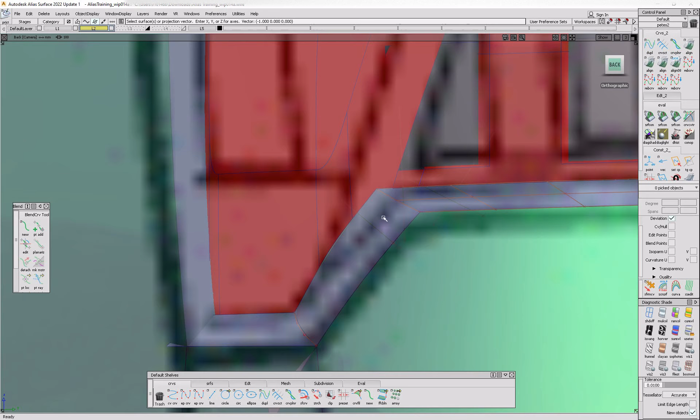I mean, we can move this back to there, which will help a bit, but not really. Oh well, keeping it like that. Right, when we put a radius in, it might help a bit. It's definitely going to be a little bit better than the last one I built a minute ago. Trim, trim. Freeform blend, blend.

Yeah, not great, but I've stopped caring now. Oh no, hey, so that's why you need to delete history, just because I trimmed away. Right, rebuild that. 1. 2. No, 1. 2. 3. Reproject the curve onto there. Delete history. Freeform blend.

And then we can give this a radius down here. It's alright, radius there. Up here, we're good there. What's this surface? I can go away. Cool, let's get the graphics in, that I guess will help when we have something there.

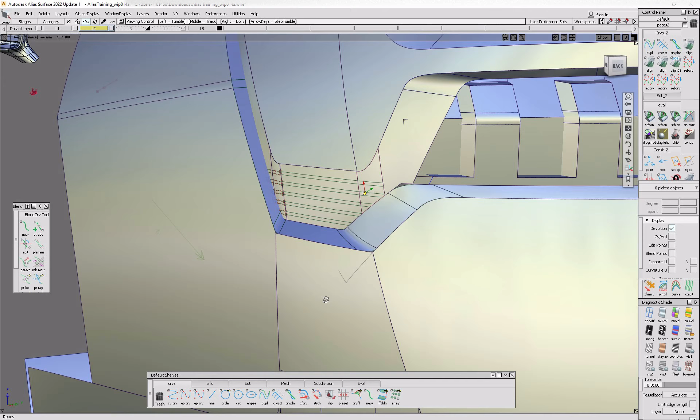And then also this here, and there's some slats in there as well. This looks like it has some 3D to it. Looks like it's trimmed away and drafted in, so there's a little pocket. Is it on the orthographic? Yes.

Let's do that, divide. Okay, yeah, so make sure that's trim divided. I'm going to delete history, move it back a little bit, and colour it a different colour.

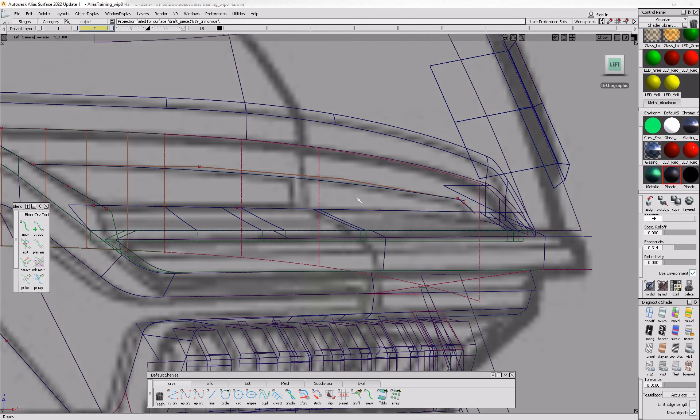Also, we need to do this as well. Yeah, this is a draft back here as well. So this is actually much smaller. And there's a draft from that out. We'll do a little gap there as well. Gonna make it a bit bigger.

There's the glass. Basically we need to... it's not looking pretty there. What's going on? Yeah, it's not good at all, is it?

And the glass is not good for the same reason it wasn't good on the inner, because I need to project a curve on and just build a skin to it. Yeah, I tried to just cheat. Actually, we need to do it properly.

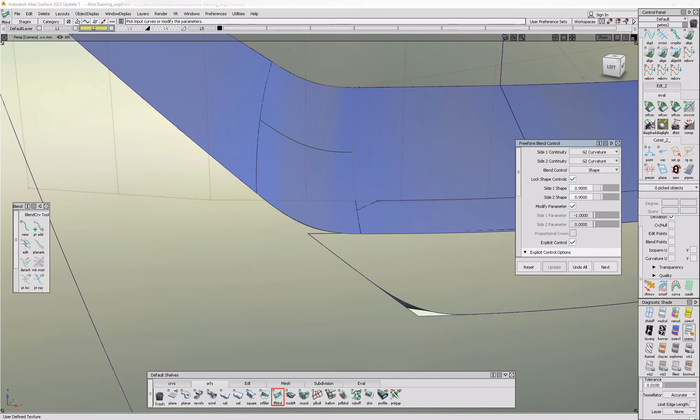Okay, so that's the new lens, fixed lens. Make it lens coloured.

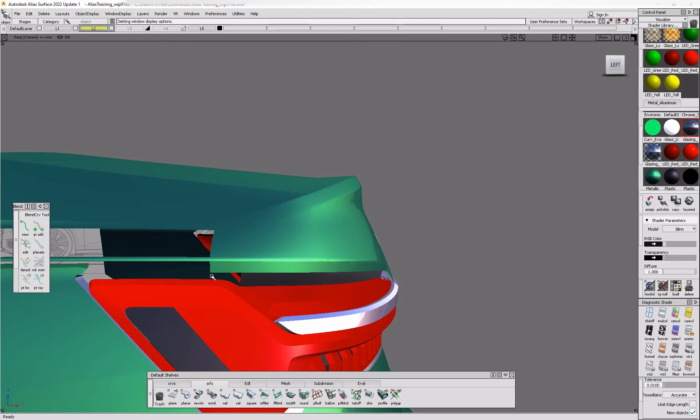And we just need to get that to run all the way down. So let's, I don't know, run this to there. Yeah, what's happened to this? Oh, there we go. I'm just going to do a monorail.

Needs a bit of twisting. Extend that through. Cool, that'll do. We'll fix this up here.

I don't know what's gone on there. Is there a reason for that? No, it's just gone a bit weird. Cool, well, we'll ignore that, fix that in a bit.

This guy. Just trim divide this. Does it go all the way through? Yeah. Find those curves.

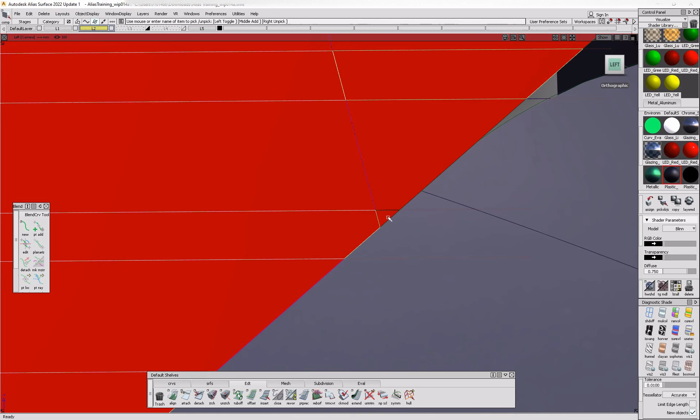So I guess we'll duplicate this, make it like an even brighter red, I don't know. Oop.

Yep. And then let's fill in this pocket.

Also, that's meant to have a radius there. We'll fix that in a bit. Let's just do this pocket first. Draft in Y.

Yeah. A bit smaller. Flip surface. And then, oh, this one as well.

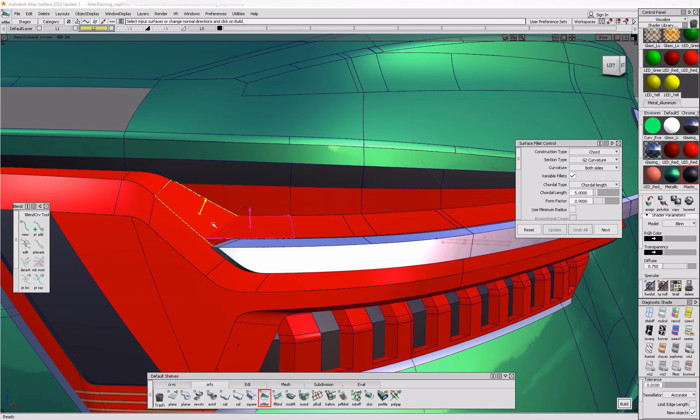And then we'll just build those little details in there and then we'll call it done. Almost. So we need to give this a rad on here. Yeah, that'll do.

Sorry, I'm just kind of flinging between different areas because I just want to get it done now. That doesn't like that. Just going to extend this through.

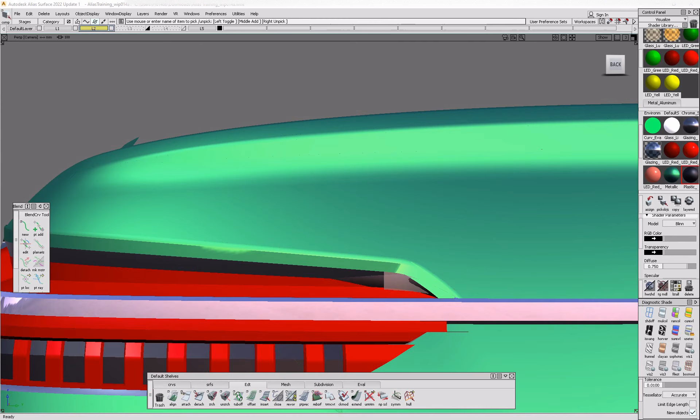Yeah, it doesn't like that at all. Try this instead.

Monorail. One, two. Bit more normal. See what happens when I extend it through the surfaces. No, it's not doing what I want.

Try monorail from here to that. Just try twisting it. Too much, 5. Wrong way, -5. -8.

Just experimenting now because I'm not really sure how to close this area off. Oh, that's completely the wrong way. Nightmare. Yeah, it's really not obvious from here what's going on.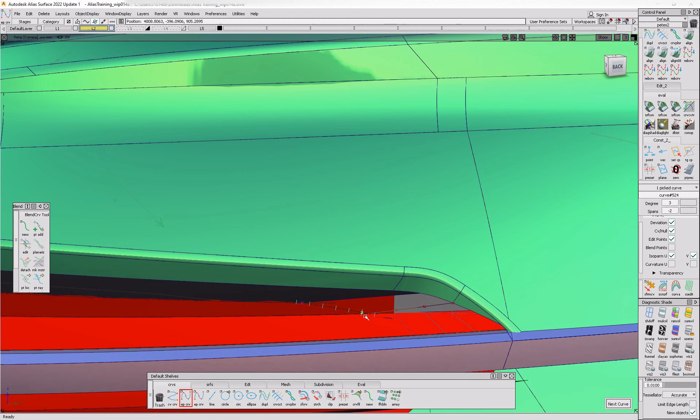Just gonna do a skin again, here to here. Just gonna have to bodge it and hope that it's not too obvious.

So I'll try the blend around there. Probably won't work, but... so I'm gonna extend this. And blend.

Curvature, curvature. Yeah, it doesn't like that at all. Connect ends. Oh my god. Kind of close.

I mean, it actually does do that. So, screw you, Hyundai. Screw you, Audi. You've obviously done something a bit weird there.

Yeah, that'll do. Just close this off here, get rid of that little hole. Delete history. And we're also gonna just give it a border.

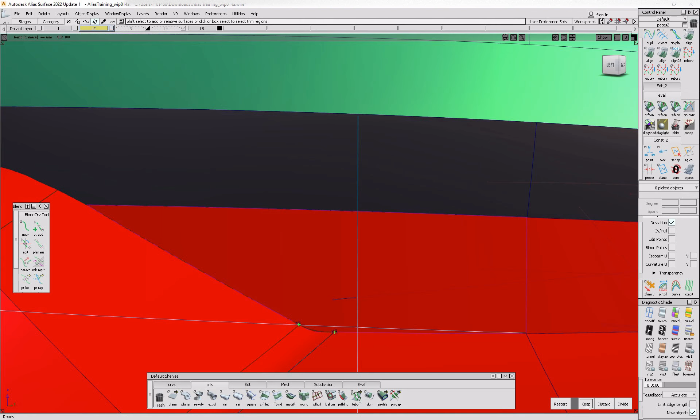Okay, let's delete history because it's going to go crazy if I don't do that. Get rid of some of the curves. Create the border around here just to separate it into a separate piece. It's too big. I'll do divide, divide, divide.

Doesn't look like I divided that properly. Cool, looks good.

And then we'll just close off these areas by drafting back in. Flip. Nice.

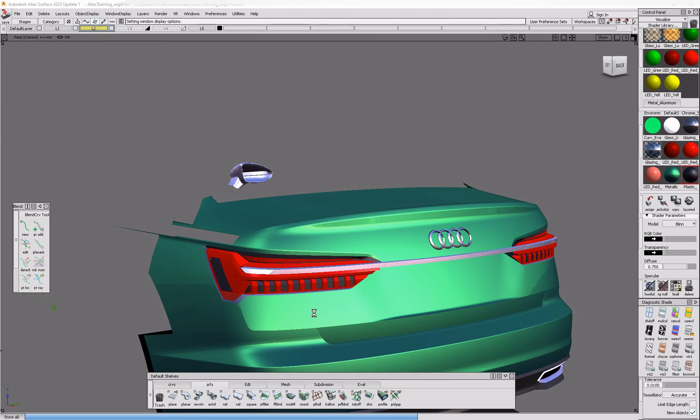And then I remembered that I need to extend this through. Draft off these to close these off. And then it's there. Let's delete history again. Save your work.

And we'll add a little radius onto here, just to clean it up. Oh, of course.

Let's trim this back. Needs to be trimmed down the centre line. Where's the curve that I'm trying to build there? 1, 2, there we go.

Oh, that's a bit off from each other now, which is annoying, but like I said, I don't care anymore, so I'm going to trim and divide that. Tangent align it. Keep it there. Make sure it's the right colour.

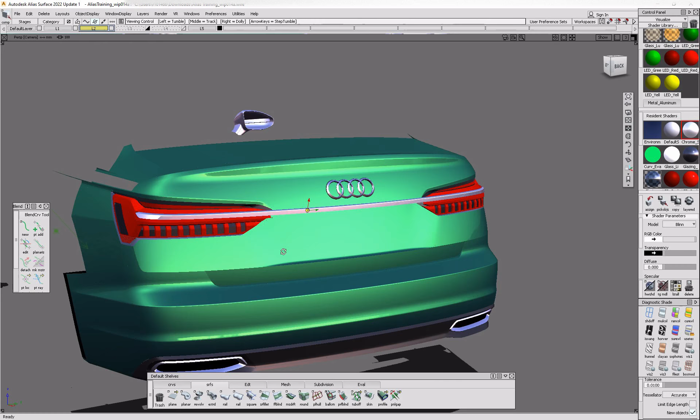Nice. Yep. What was I going to do? I was going to extend these through. I'm going to convert that down so it's easy to deal with. Make sure it's the right colour. Extend it through. Same with this guy, extend through.

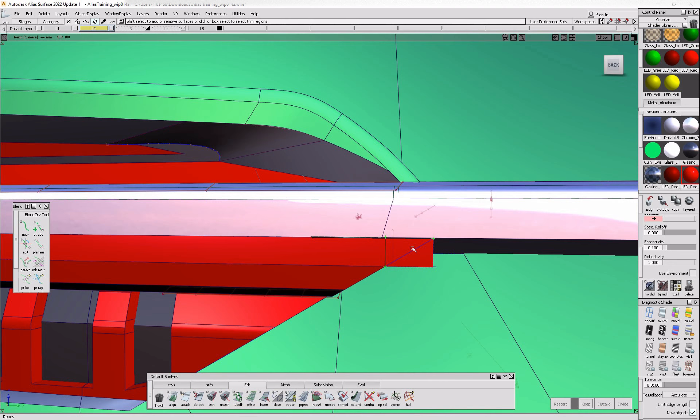Nearly there. Okay, just project that curve on, trim it back. And then just draft back off of those to close them out. I feel like that should actually go all the way.

Yep. Draft. I'm sure it does something like whatever.

Looks cool, and to make it look even more finished you can just round all the little edges if you can be bothered, but I can't be bothered.

Let's get this at least wrapped around properly. 1, 2. Freeform blend, change your line.

Close this off as well. So the monorail. Curvature.

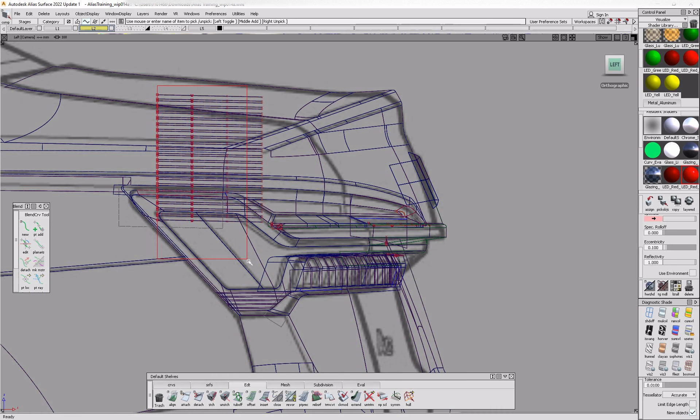Edit, duplicate, object, 8 mil. And we'll do, I don't know, 20. Go. I've gone the wrong way again, it doesn't matter. Move those down.

Cool, right, that'll do. Let's bring the glass back, and we will have to radius up the glass for it to look better.

Like at the minute it looks a bit rough around the edges, because it literally is. Just needs rounding off like we did on the headlamp, and it will look nice. What's going on up here?

Oh damn. Oh, missing those, that'll help. So yeah, that edge probably of the glass needs to come up a bit just to make that all run together better, but that's fine.

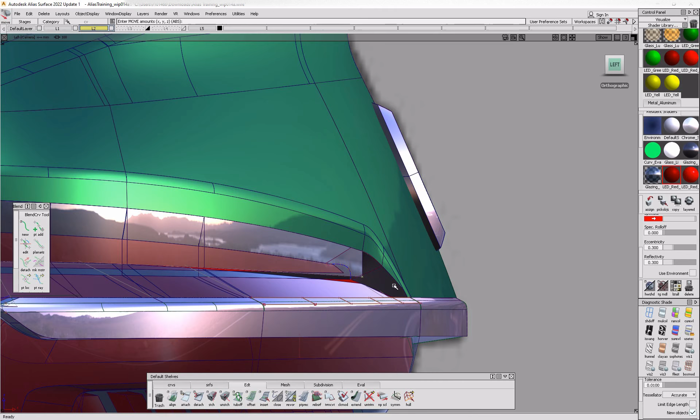He needs to come up here and then just rebuild those surfaces to that. One blend.

I'll just extend that through. We'll get rid of that.

Are we missing? Yeah, we're missing those. How's that look? Not great.

It's okay though. Basically just need to do. Yeah, we'll fix that. See, this needs to come back a bit.

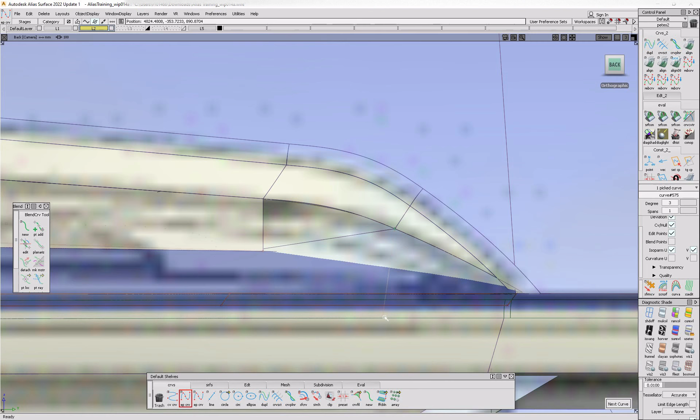Do instead is rotate. And this can be the glass.

Don't know if it's going to work. Just freestyling now. Anyway, that'll do.

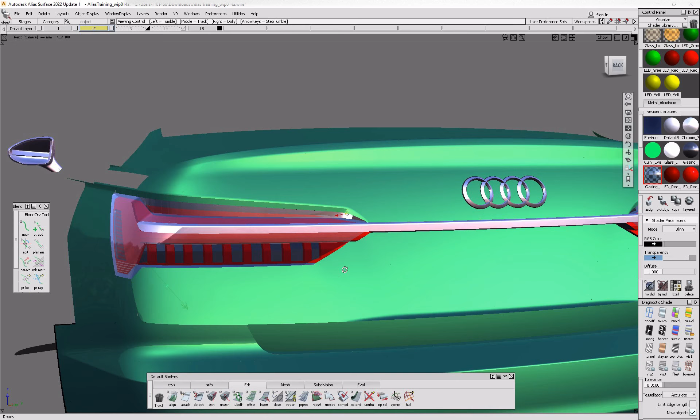Okay, and make sure that it's a lens colour. Make it a bit more transparent, I think. And then we also need to make sure that that extends to that point as well. And then we're done.

I'm going to trim convert that down as well, I think. Yeah, extend. 1, 2. Keep.

Just giving it a bit of an offset from the inner, so they don't crash into each other. Alright, and then draft back off that, and off that.

Of course there's a gap there now for some reason. It doesn't matter though, because it's just a chrome strip. Cool.

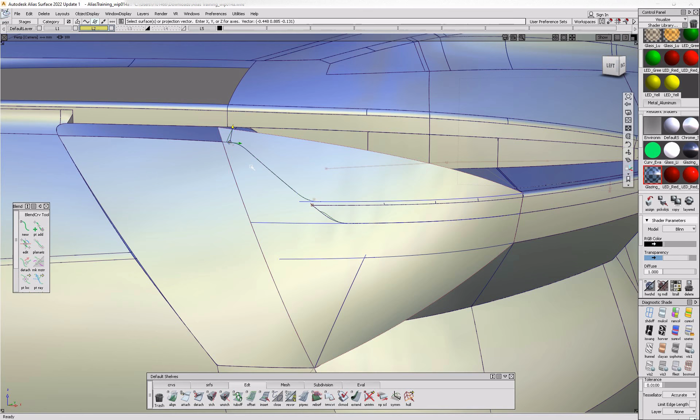Don't forget to save your work. That's because of history, that's what's messed everything up.

Just going to blend these together. I don't care anymore, come on, just get it trimmed. And yeah, when we put like a radius on there, we'll fix that area. I mean, but for now, I'm calling that done.

Let's bring the whole car back. Have a look what we got. That's the curves. Nice. So we have a tail lamp, which doesn't look terrible.

Just yeah, like I said, once you put radiuses on the lens, it will look a lot cleaner. But yeah, nice. For the next tutorial, I'll show you how to put these obscuration bands and seal in, because I skipped that bit.